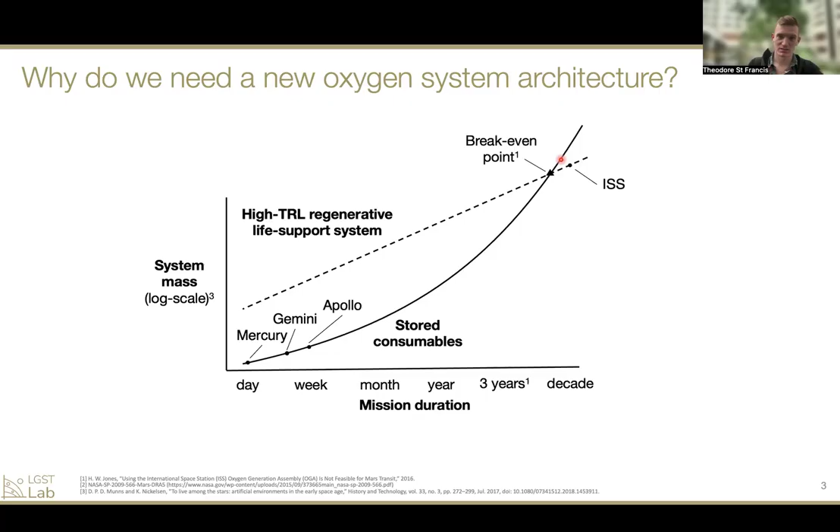So some background. What you see here is a notional, but qualitatively correct mass versus mission duration plot. You'll notice that there is an essentially exponential curve for the stored consumables and a linear curve for a regenerative life support system. And some missions that we all know fall in these places. And what you'll notice is that there's a break-even point somewhere where it is more mass efficient to launch a regenerative system than simply bringing bottles of oxygen.

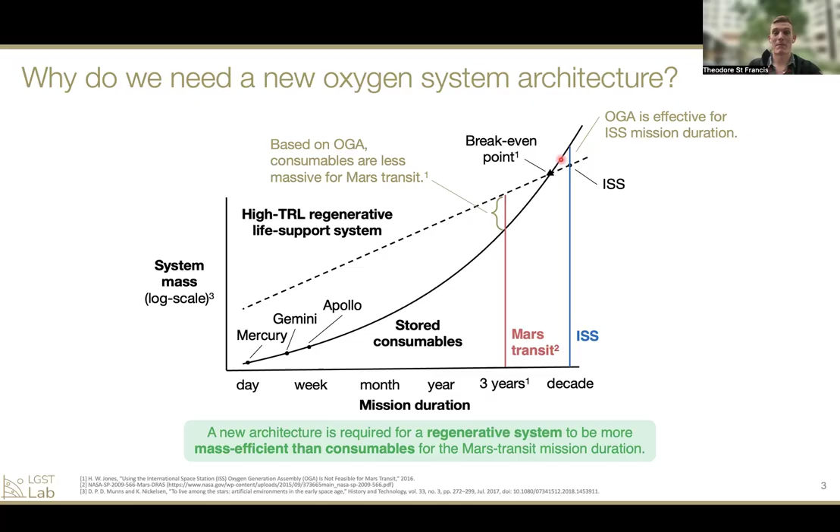For the mission duration of the ISS, the Oxygen Generation Assembly, OGA, has been well suited to the mission duration. That assembly went online in 2007, and in the last 18 years has produced many times its own mass in oxygen. For the Mars mission duration, which is on the order of 3 years, that design of the system would not be enough to overcome the mass penalty of launching all the hardware required to close the loop on the regenerative system. This is based on a systems analysis that was done, as you see at the bottom. And so it's clear that we need a new architecture if we want a regenerative system to be more mass efficient than stored consumables for that particular mission duration.

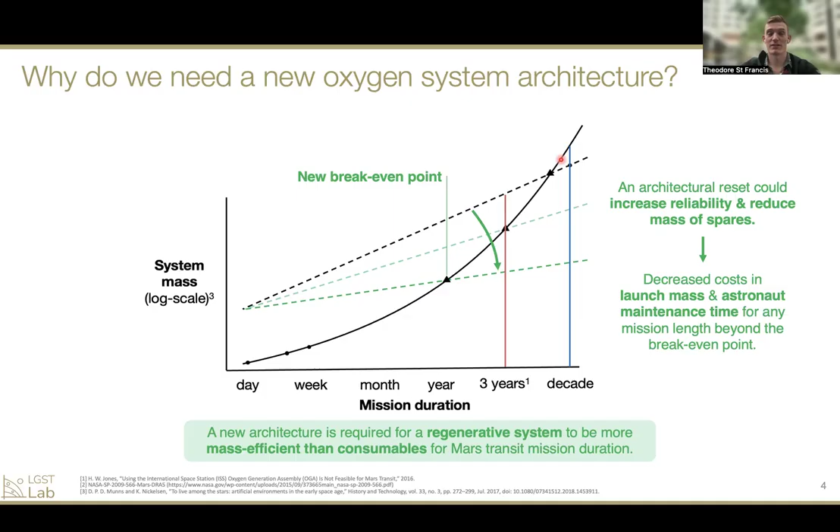What this new architecture would do is essentially lower the slope on the mass curve by increasing reliability and thereby reducing the number of spares so that the launch mass is reduced and the maintaining mass is lower for that different system. And if we can reduce astronaut required time for maintenance, and increase robustness and reliability in other ways, that would also be ideal.

This design is geared specifically for microgravity operation because it's very challenging to accomplish reliable phase separation in the microgravity environment. And if we can combine both gas generation and gas evacuation in the same cell, we could dramatically simplify the architecture and save launch mass. It would reside within a larger oxygen generation assembly, which would rely on heritage orbital replacement units, ORUs, which have been used on the International Space Station for the last couple decades.

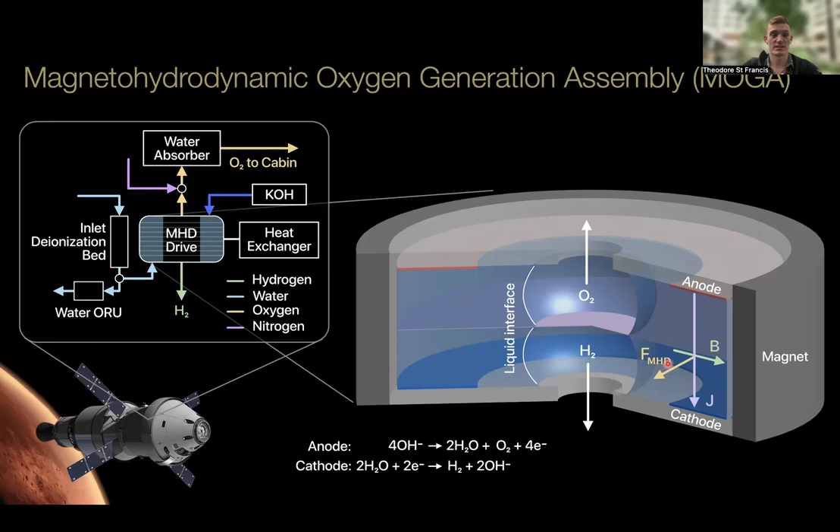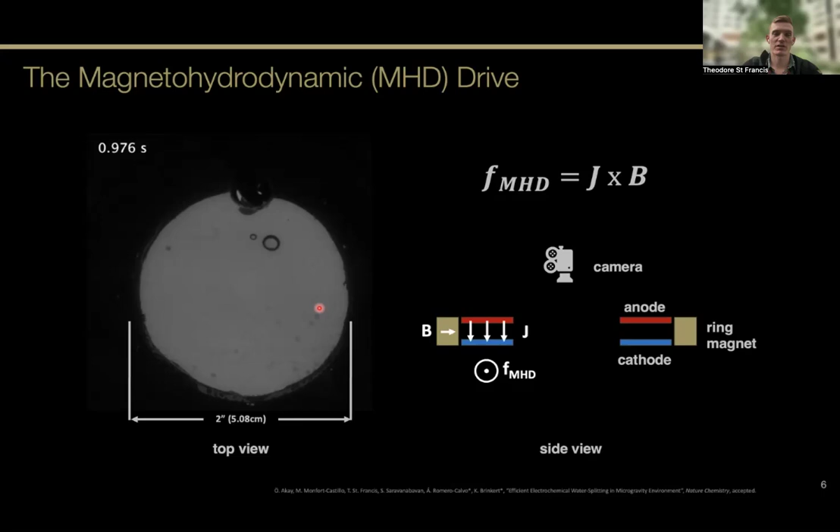So here's what that looks like. The video that you're about to see is observed from above, and we have ring annular electrodes with a magnet around the outside. And what you'll see is a swirling field. This is a microgravity test in a drop tower, an experiment run by Dr. Alvaro Romero Calvo and Dr. Katharina Brinkert at Bremen. And you'll notice that the flow, which is resulting from no moving parts, accelerates the bubbles toward the center, and the liquid electrolyte is forced toward the outside.

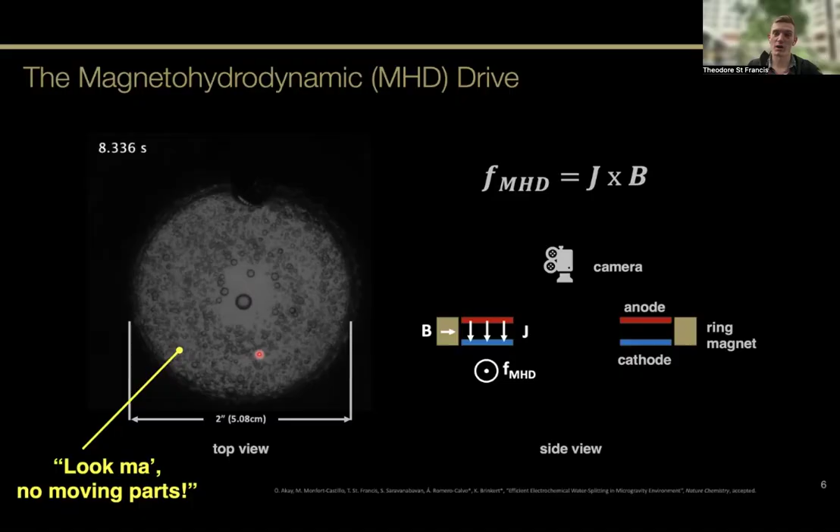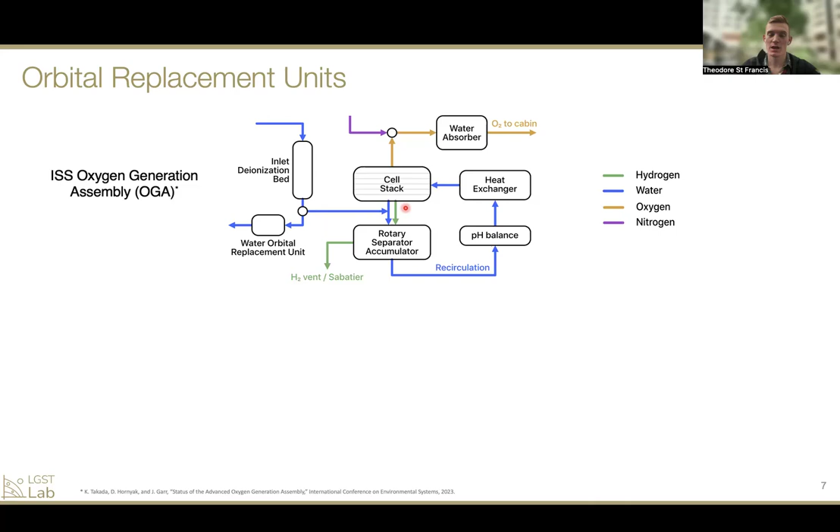So the point of no moving parts is that those tend to malfunction in space. Gears don't do well with long-term storage or the loads from launch. And so by eliminating the recirculation loop shown here, which includes a pump here and a rotary separator accumulator, which is what currently accomplishes the hydrogen gas and water separation. If we can eliminate this recirculation loop by performing phase separation inside the cell stack, then we would dramatically simplify the architecture and reduce the number of spares launched, reduce the launch mass.

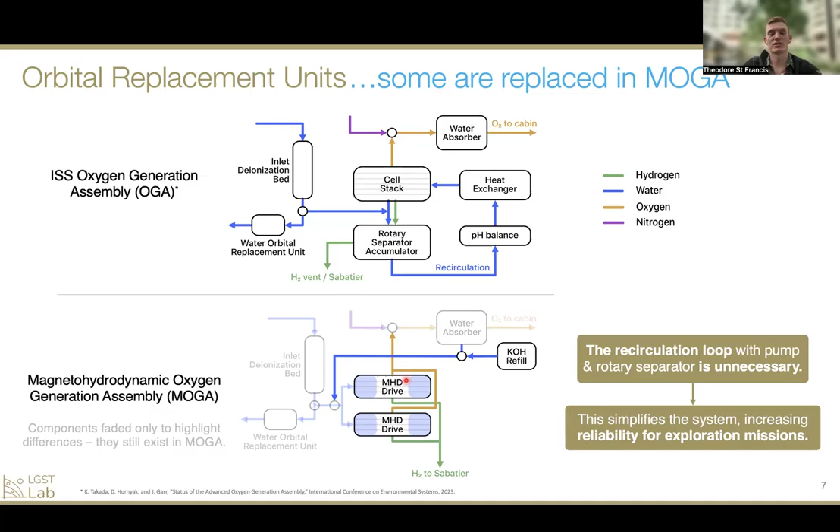There would be an added potassium hydroxide refill, which would be a nominal on the order of 20 kilograms for a 3-year mission. And there would be a group of drives for the analysis that was done. There were an assumed 2 drives such that one could maintain oxygen generation while parts were replaced on the other. But what you'll notice that's missing is the recirculation loop along with the rotary separator, because phase separation is accomplished in the drive, and pH balance is no longer required, because the membranes used for PEM, proton exchange membrane electrolysis, on the OGA and alkaline electrolysis are very different. The alkaline one is much more robust.

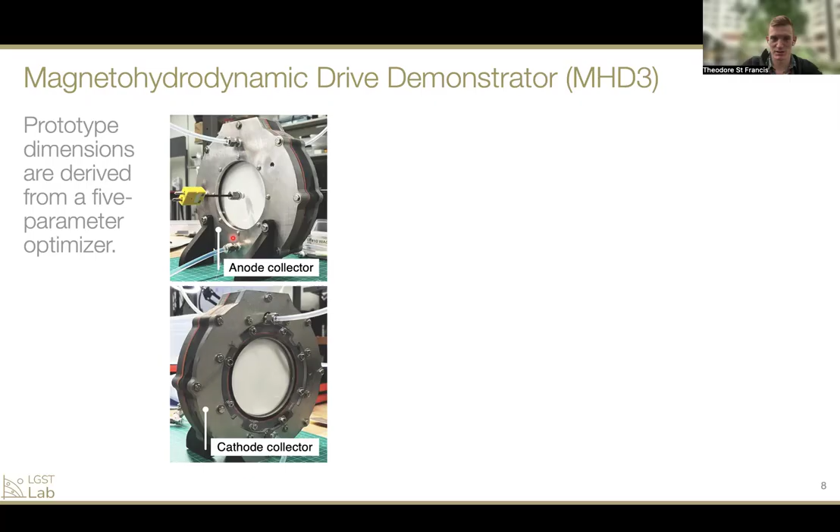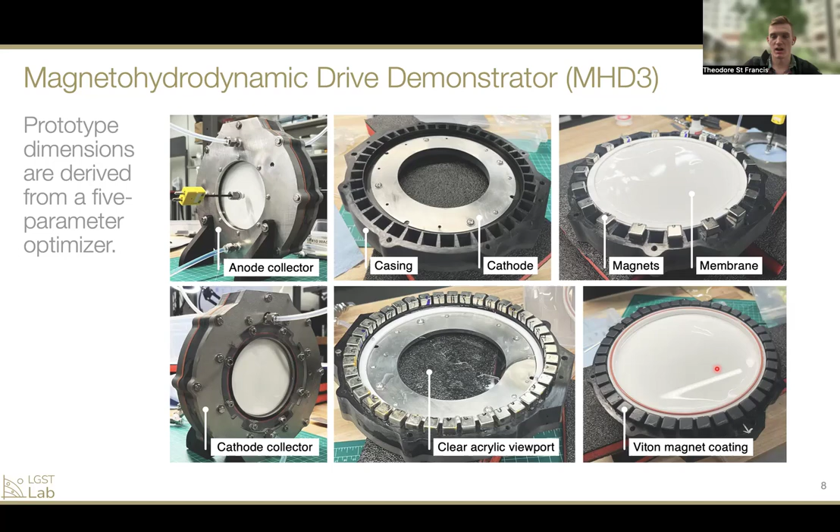So here's the prototype that we built to test some of the models used in the optimizer for this system. The dimensions were drawn from the optimizer for building a representatively sized electrochemical cell for the spaceflight application. This is 10 inches or 25 centimeters in diameter. And here is what the inside looks like. You'll notice there's a plastic casing, stainless steel electrodes, the Zirfon membrane, which allows ion transport through, but restricts gases to their respective sides. There's a ring of magnets around the outside, and those are coated in an insulated coating just in case leaks occur.

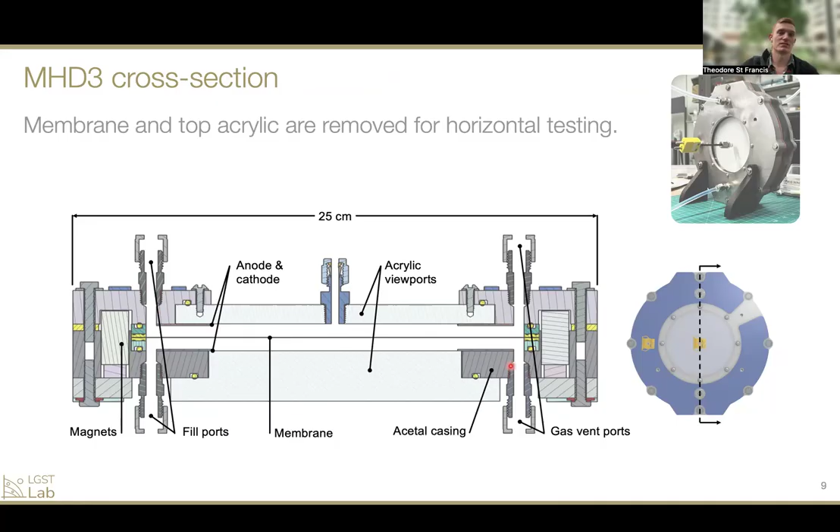Here's the cross section. For the horizontal testing, you'll see in a moment, the upper acrylic and the membrane were removed, and the fill and drain ports here were designed to allow for operation in the vertical orientation so that refill electrolyte can come in the bottom and gases can escape out the top. We're testing in Earth gravity, whereas the design is optimized for microgravity. So we had to kind of split the difference there. Here's what the experimental setup looks like. You'll notice the membrane is removed, the top acrylic is removed.

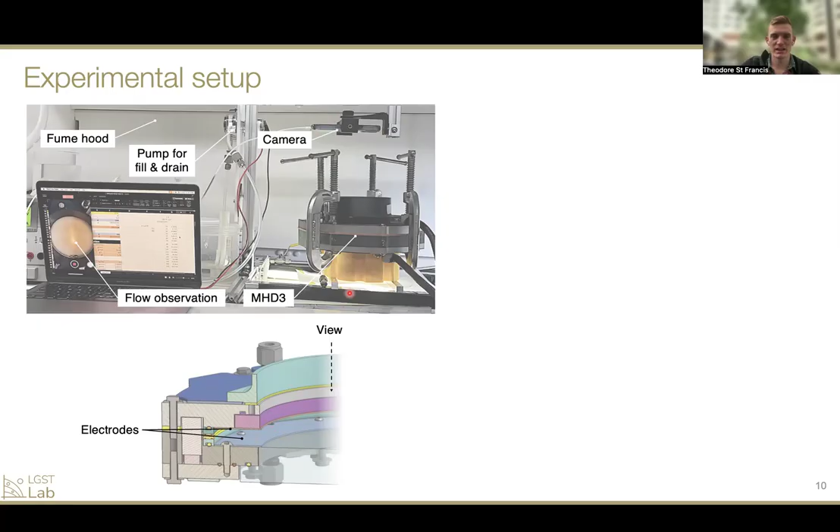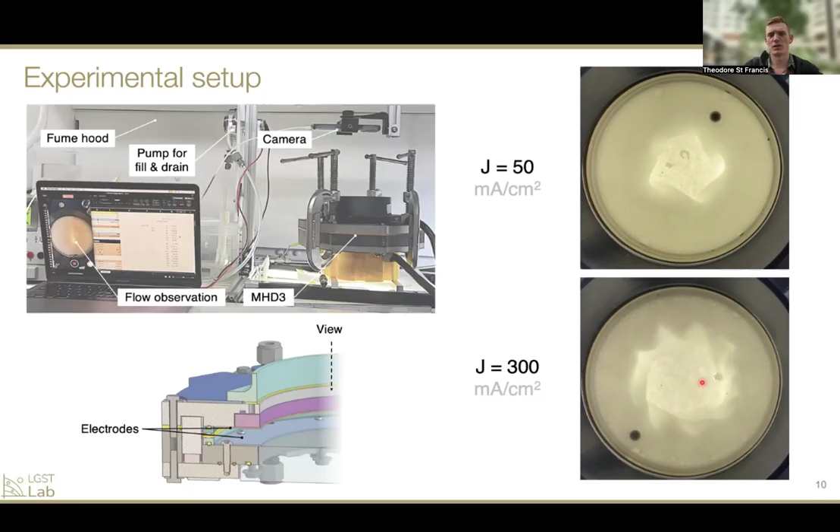We're looking down from the camera here into the drive, and then we're imaging the flow. Current densities of 50 and 300 milliamps per centimeter squared. And you'll notice that a similar flow to what you saw in the drop test is produced. And you can see that the angular velocity qualitatively scales with the current density, which is what we expect from the Lorentz force. And you can also see that there's some turbulent regime here as the layers of bubbles and the flow on the outside shear against the flow on the inside.

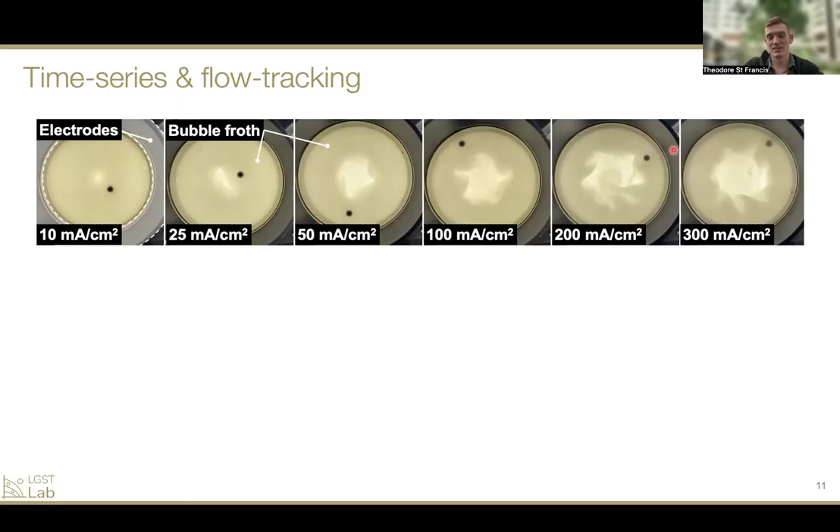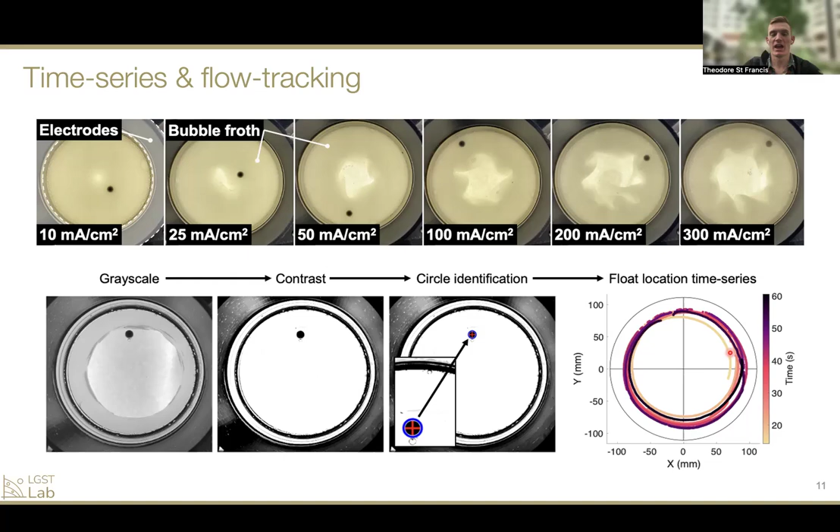And from that, we can extract angular velocities, which are the slopes of these curves in the angular displacement and time axes here. You'll notice that as we expect, increasing slope occurs with current density. You'll notice that the upper current densities are much more linear, which indicates that the rotation rate was much more constant.

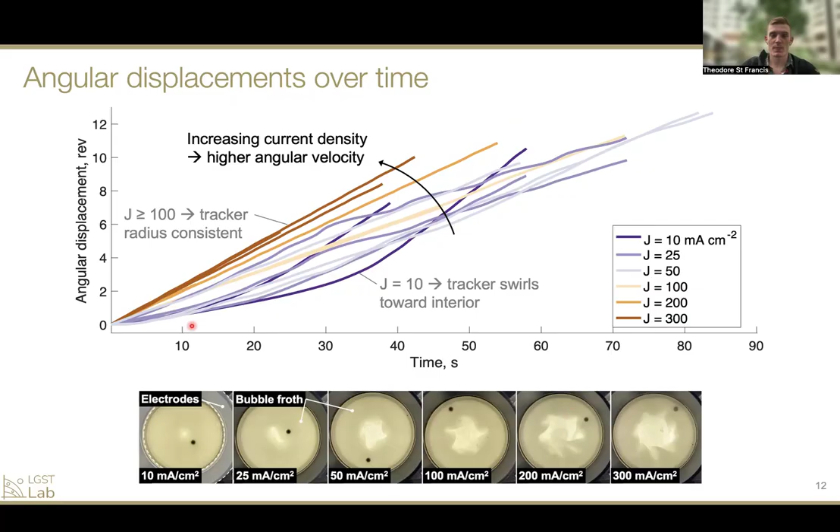The tracker also stayed much more at the same radial position in the drive during testing, whereas at the lower current densities, the float gravitated toward the center, as you can see with this upswing, and that's likely due to flow asymmetries as a result of bubbles getting caught on the upper electrode. Again, we're in 1G as opposed to microgravity here. So those are some of the differences among current densities.

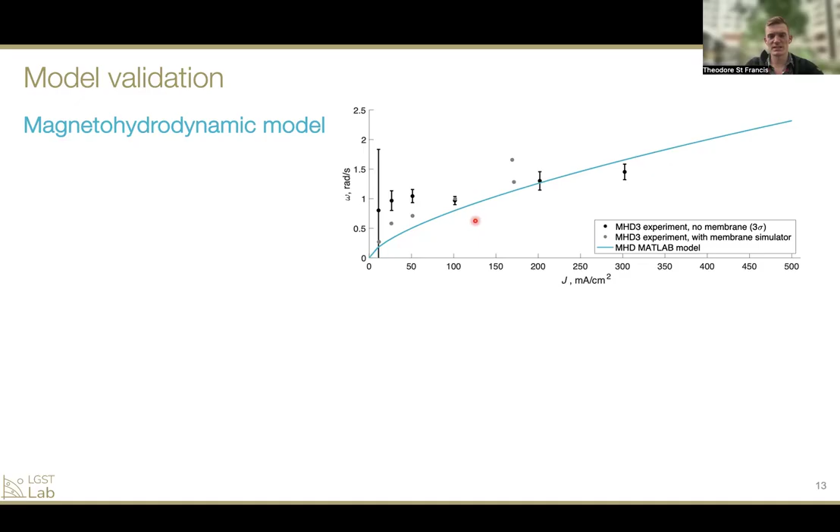And here's how that compares to the model, which is a torque balance between the magnetohydrodynamic torque from the Lorentz force and the viscous torque drag on the walls in the drive. You'll notice that the model predicts within 18% at the current densities that we're interested in. It underpredicts at low current densities, likely as a result of current density asymmetries. Again, bubbles on the electrodes, most likely. The model does not capture turbulence at the upper end, so we're overpredicting as we go to the higher current densities.

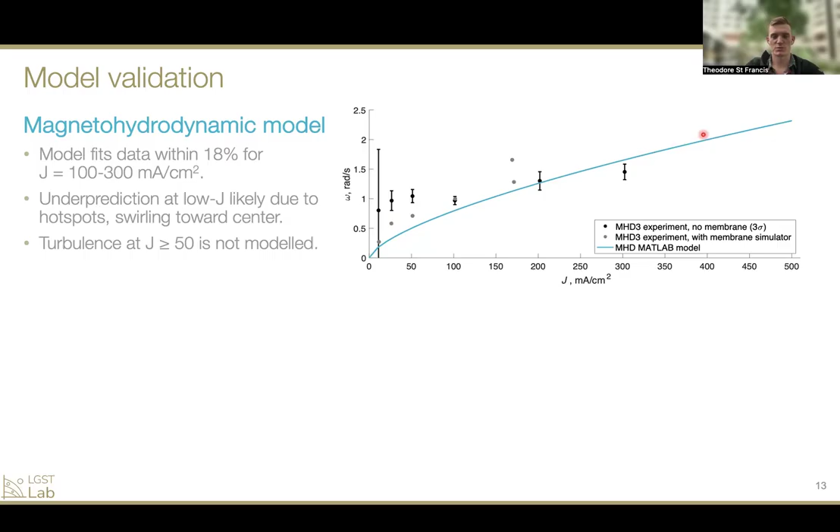The electrochemical model is a very different story, however, because of the lack of optimization of orientation relative to gravity. Again, bubbles are sticking to that upper electrode, which is dramatically impairing performance. And there was no optimization of the electrodes for electrochemical parameters. They were stainless steel and simply sandblasted to create an even surface. And so in the flight model, there would be a lot more optimization done.

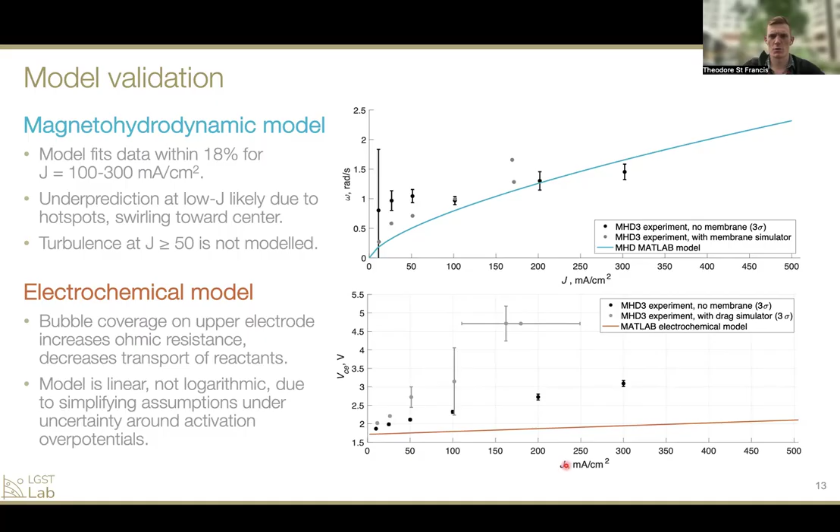The model is linear as opposed to logarithmic, as Tafel slopes would predict, just based on uncertainties around what activation overpotentials we could expect for this future technology for nickel electrodes in an alkaline environment. So significant development would need to be done to validate, and that would only really be possible in a microgravity environment. So that was kind of out of the scope of this project. Overall, what this means is that the magnetohydrodynamic model is what we expect, which is a great check.

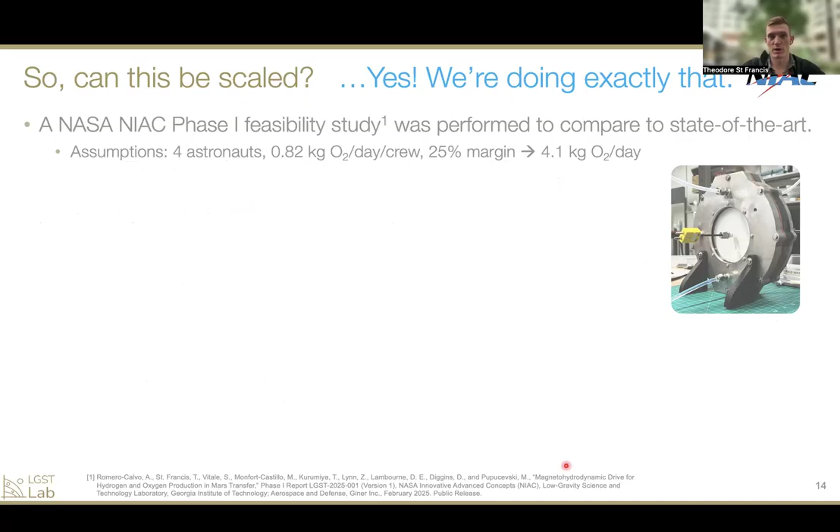And we are working on the Phase 2 for the NASA NIAC proposal, supported by our collaborators at Giner Labs and those at ZARM in Bremen, Germany. The parameters for the optimized drive are shown here. There would be 24 cells required to support 4 astronauts at 25% margin. And the power and waste heat are shown there.

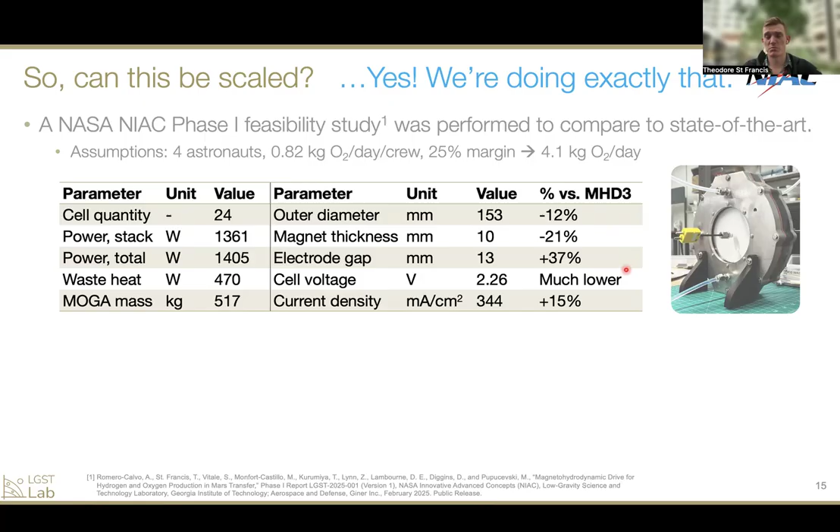The optimized parameters for the drive are shown here relative to the prototype that was made. So in the flight design based on these models, we would shrink the outer diameter, shrink the magnet thickness, and increase the electrode gap to allow for more rapid gas evacuation between the electrodes. The cell voltage, as discussed before, would be very different based on the performance in the microgravity environment. And we were right around the current density that would be optimal for this operation.

Other advantages of this architecture include resistance to feed water contamination. The proton exchange membrane electrolysis membrane is much more sensitive to impurities, whereas the alkaline architecture is much more robust to those. Resilience to dormancy. There would be approximately a year and a half, by some mission CONOPS, of dormancy in Mars orbit as the astronauts descend to the surface. And the alkaline architecture is much more resilient to that dormancy period.

And then component-level swappability is something that has been discussed for the AOGA, and it's something that we've incorporated here to understand what the benefits are, for example, allowing single cell replacement or complete drive replacement while maintaining the magnets where they are, that kind of thing. So the bottom line is that the MOGA is a promising alternative for exploration crewed missions to Mars or beyond.